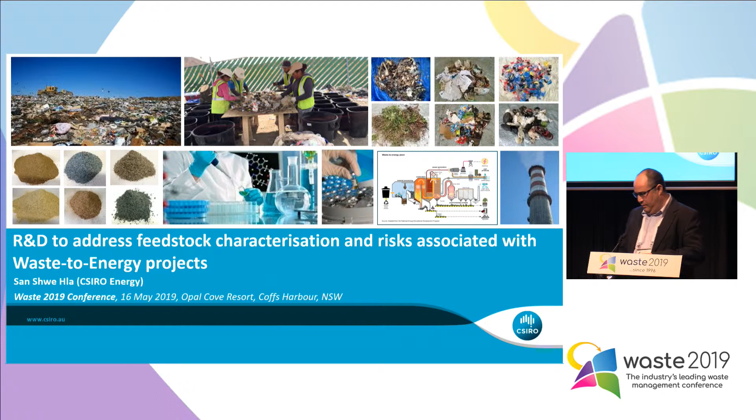Let me start my presentation with a statement from 2017 from the World Energy Council. The message here is that waste to energy remains a costly option, but it's no longer a threat to the environment. What I try to emphasize here is if you follow the protocols and standards from the local, federal or country environmental authority, waste to energy is no longer an environmental problem.

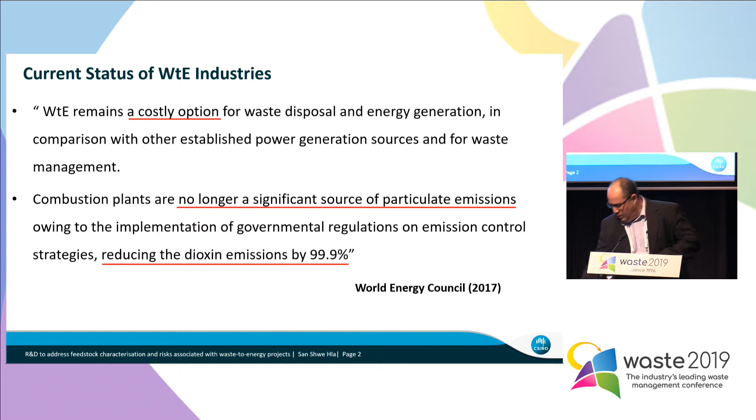But there's one thing that people always tend to overlook: the importance of understanding feedstock characterization. Historically, CSIRO Energy has a very strong research area in coal utilization, especially coal gasification. We try to understand the different types of coal and how they affect real gasification conditions. When we extended this research into waste and biomass, the first thing we did was try to understand the world, because we have no waste to energy plant in Australia, so we had to understand the current state.

So first we reviewed all the waste to energy technologies, including combustion and gasification, listing the state of the art, the real practical application of combustion-based waste to energy, and the R&D status of gasification waste to energy. In this 60-page report we also included a case study from Los Angeles County in the USA, a waste to energy plant one of our team members visited.

In this report we also included the last waste to energy project that tried to establish in Australia about two decades ago, and how and why it failed. After that, we learned that one thing is very, very critical: understanding the feedstock, its chemical properties and how they change seasonally and regionally. Without knowing this, there will be a lot of risks in a real waste to energy plant.

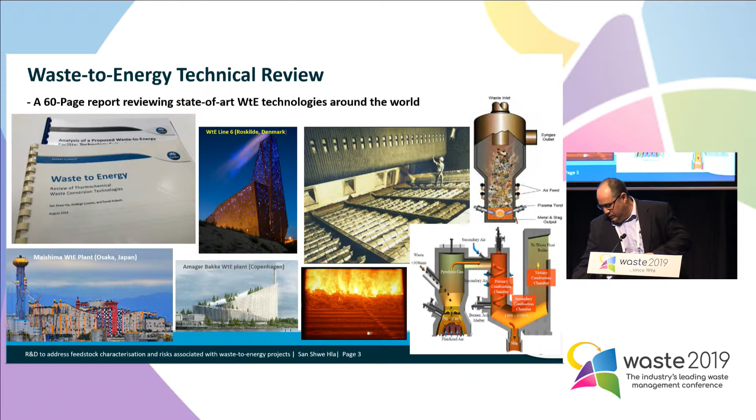When we understood that, I tried to find data around 2012, 2013, and I couldn't find anything. Maybe data is hidden somewhere, but in the public domain we can't see any characterization and chemical properties of the waste. That was reasonable because all the wastes were recycled and landfilled, so what we needed to know was what type of waste, how much plastic, how much food waste, but not their chemical properties. We have a lot of data in Brisbane and other major cities from yearly or two-yearly surveys on waste physical properties.

We ended with 9 categories of combustible waste, and then we tried to follow a protocol that can be sustained so we can do it in future. We do the air drying, sizing, and after that the chemical analysis of each component.

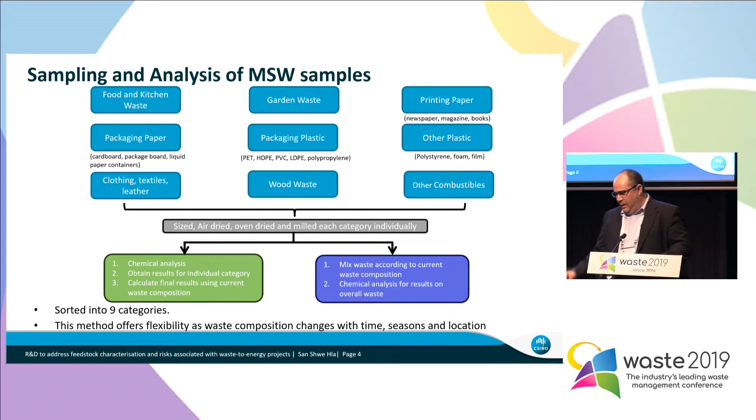But opposite to the food waste and garden waste, plastic has a very low moisture content, and they have very high carbon and hydrogen because they are petroleum-based waste, and they have a very high calorific value. This project represents the Brisbane City Council, one of the transfer stations.

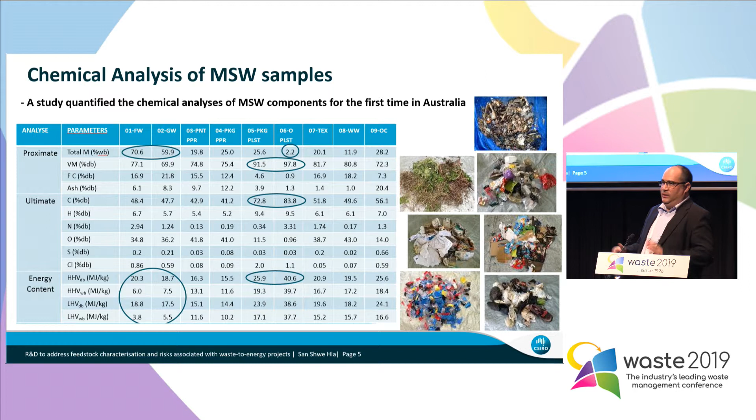But using these data, we have confidence to a certain level. We can also try to find the calorific value of other places, other cities' and state councils' waste, by applying this method, and then we can get the calorific value if we know the physical composition of the waste. So that's what we do in the next step.

This is the comparison between Brisbane and the Southern Sydney Regional Organisation of Councils. There are 15 councils involved. This study was done by the APC Waste Management Company, and they spent about 4,000 hours with 34 tons of waste, and then finally they got the data. So from the data, we try to align with our categories, and then we compare it here.

If you look at the very beginning, it looks like they're not similar. But the main difference is the garden waste, because the garden waste from the Brisbane City Council is much higher than the Sydney local region. If I normalize without garden waste, they are aligned quite well, but that graph is not here.

There can be two reasons. In the Sydney council, the land is limited, people live mostly in units and apartments, so maybe the green waste, garden waste generation is less. That might be one possibility. Another one is they use the third bin more effectively, so it goes separately as garden waste, not ending up in the landfill. Or it might be both reasons. But this is how the regional waste management system can vary the composition of the waste.

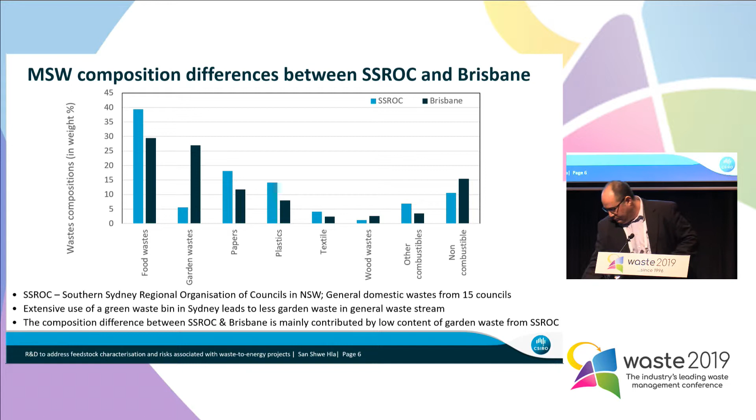So what we practice is that we try to understand how we can apply our previous method here. The first column presents the Brisbane City Council. The second one is Sydney, calculated using the Sydney waste physical composition. And the third one is a hypothetical case: what if we remove 50% of the food waste and non-combustible waste, which are the very low calorific value components? And then now we got the net energy content there.

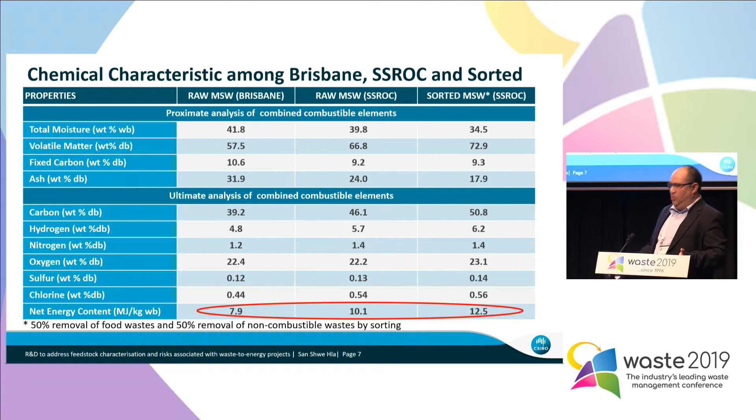So Brisbane is the lowest, followed by the Sydney municipal solid waste, and then the sorted one. So this is how we can analyze it. And then after that, we try to understand, okay, if those are going to modern waste to energy plants, what should the emissions be? We need a very sophisticated model to do that, and that we don't have.

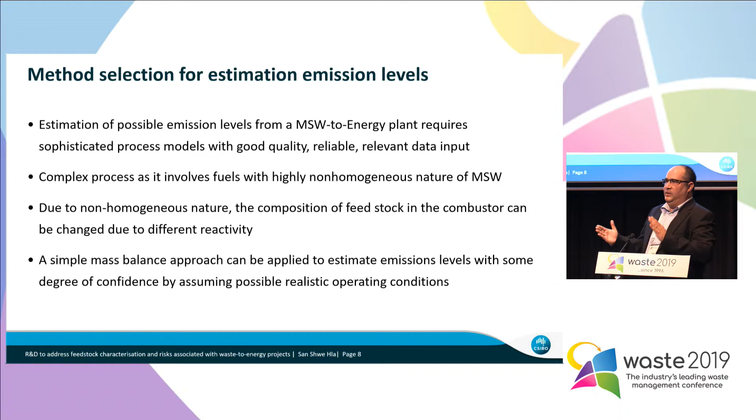To do this, we need a very complex process, because waste is a very non-homogeneous fuel. And because of that nature, we have to include a lot of realistic values there. So what we try to do is a simple mass balance approach, but with a lot of assumptions that represent real waste to energy plant operating conditions. From there, we try to estimate the emissions.

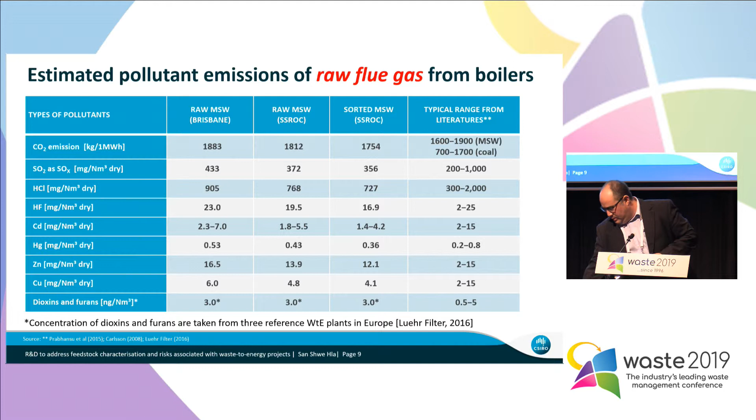So now let me briefly introduce our other involvement in the waste to energy and waste and biomass area.

farming or landfill. But for example, in Brisbane, they have to go very far, about 150 kilometers from Brisbane, to dump them. Because of the high moisture content, they are very heavy, and it costs significantly for transporting. For example, it costs about, I think, $10 million for the transporting only. So we try to understand what the alternative use of those biosolids should be, because the energy content is there.

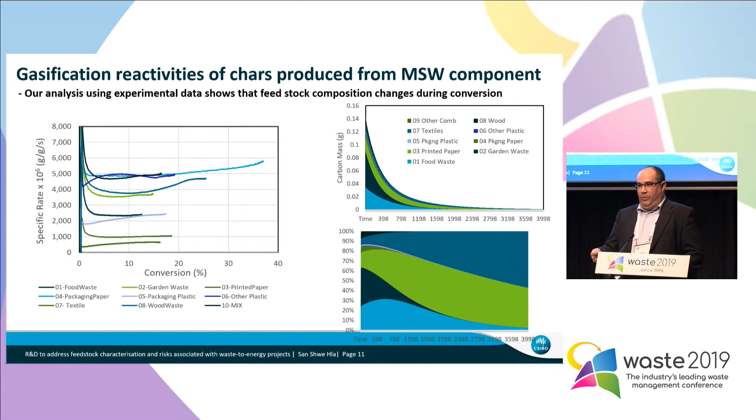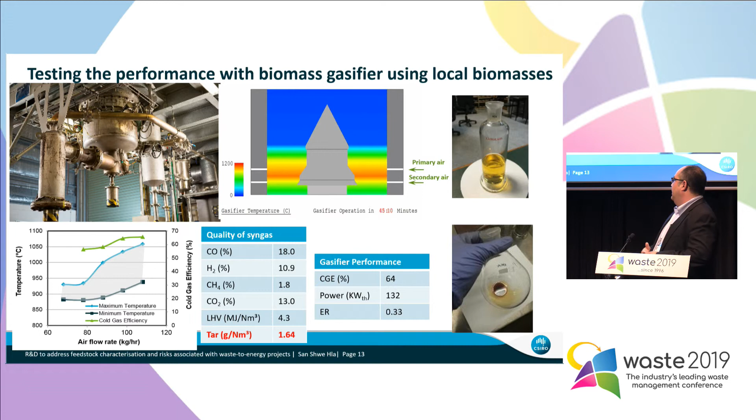Those show the temperature profile, the tar content, the effect of the air, and the quality of the syngas. This is just a brief introduction again. So this is the analysis of the mineral matter. One thing is, waste to energy does not completely remove the requirement for landfill, because of the mineral matter. It depends on how you deal with it. Maybe you can separate it with a separator, or manually separate all the glass and mineral matter.

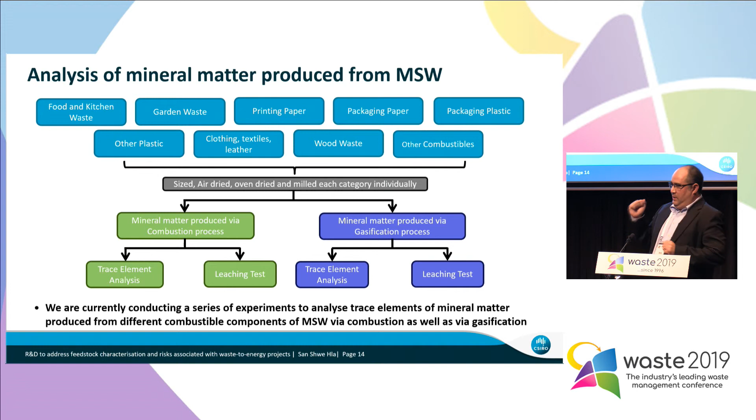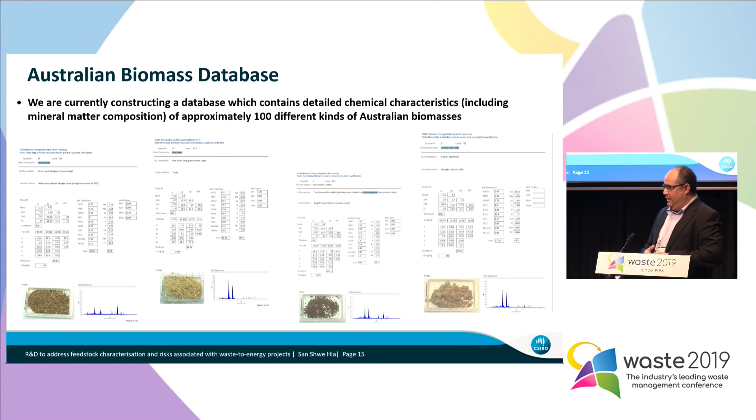And it will be interesting to see the difference between mineral matter produced from the combustion process and the gasification process as well. And we have quite a lot of biomass data as well as other waste data throughout CSIRO research activity. So we are now developing a database for about 100 Australian wastes and biomass. After it's finished, it will be available in the public domain.

All right, this is a summary. As you can see, what we do here is quite fundamental, because this is our role, the researcher point of view. We try to understand waste characterization, waste chemical properties, their reactivity, and their mineral matter chemistry, so that this basic information can be applied in real world operating conditions, especially to match the feedstock and the suitable technology.

And this morning, Mike emphasized that we need data, very reliable data. It can be the overall statistics, but it also includes this kind of fundamental technical data that can contribute to the deployment of waste to energy in Australia.

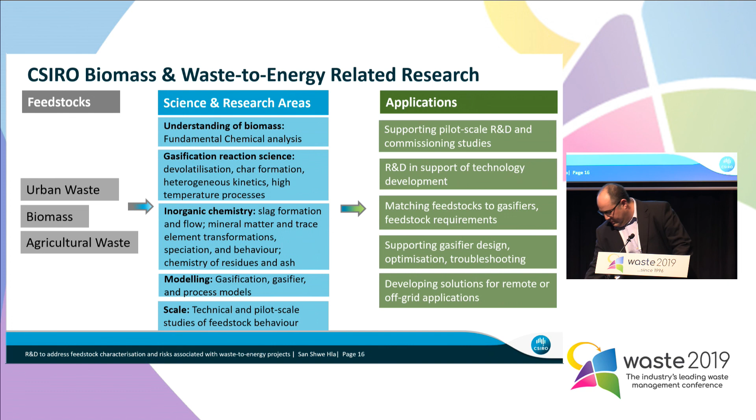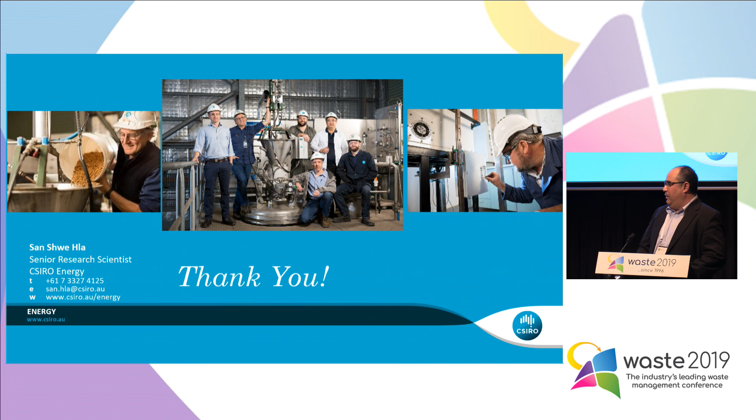And this is the application and waste team photograph. I will conclude my presentation here, and then I will hand back to Ted. Don't run away yet. We've